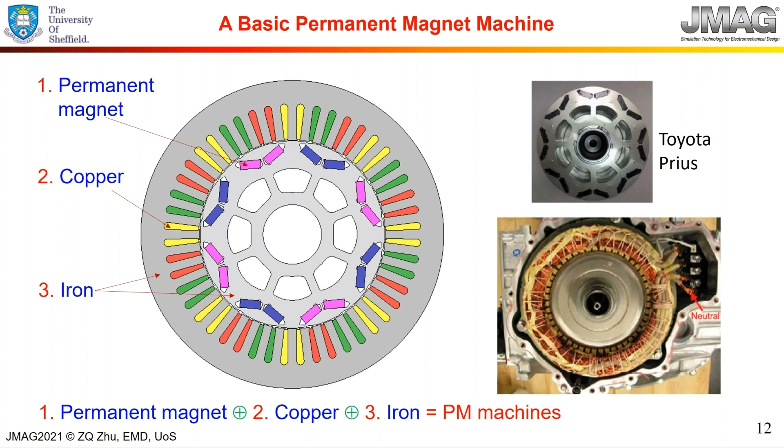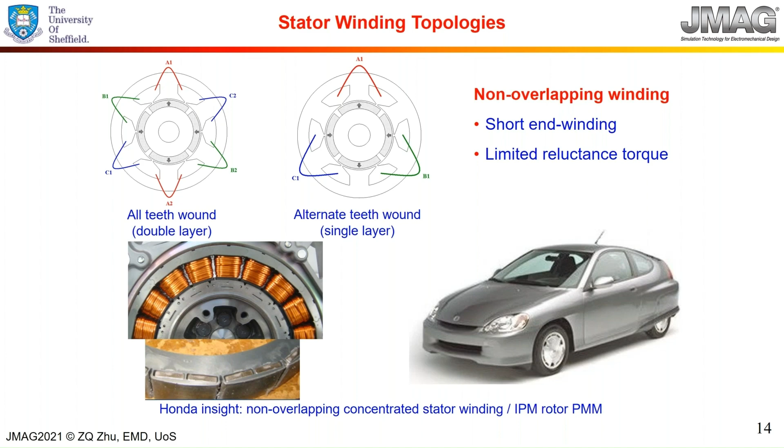So the reluctance torque will be reduced. It also, sometimes depending on the slot number, pole number combination, could even disappear. This is why if you look at electric vehicles, the vast majority of machines are not using this one, but using this one instead.

I'll go a bit further anyway and talk about the fractional slot interior permanent magnet machine.

Professor Zhu, sorry to interrupt you. I think it's time for launching the first poll. Okay. Fine with you? Yes. And in the meantime, it seems that on your screen we cannot see the cursor of your mouse. So when you are showing something, we are not able to see. So maybe can you just try to unshare your screen and share it again? Maybe it will solve the issue. I share my screen now. In the meantime, I will start the poll.

So to all the attendees, you will see on the screen the first question. Okay, so now you should see the question. So you can answer the poll. We will let you a couple of seconds to answer it. So the question is why it is preferable to use IPM machines rather than surface-mounted permanent magnet machines: because IPM machines use more magnets, produce more eddy current loss in the magnets, or have no additional magnet retaining. So you can answer the question, and we will review the answer maybe later during the presentation.

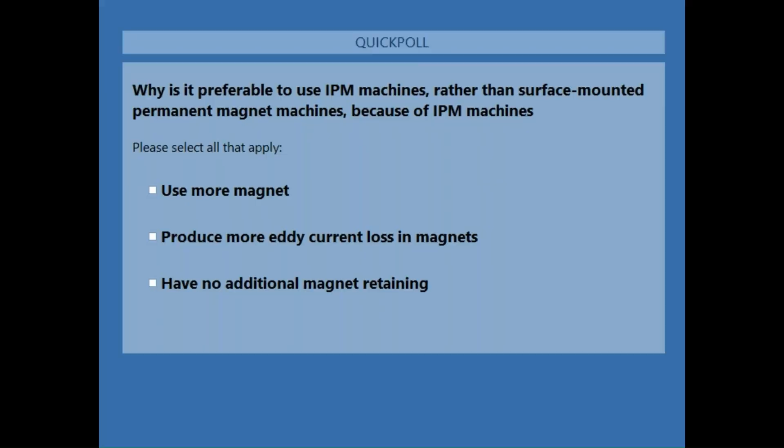Okay, shall I come back? Okay, maybe Professor Zhu, let's wait a couple of seconds again to let people answer. It won't be long. Interesting. I can't see your screen. I don't know whether the audience can see the question. Yes, because I'm seeing they are answering, so I'm sure they see the question. That's good. But maybe it's because you are sharing your screen. Very simple question. Okay, 10 seconds. Please answer now, and we will go back to the presentation. Okay, so I will close the poll right now. Thank you for all your answers. Okay, Professor Zhu, can you share your screen? Okay, I can see your screen now.

So in summary, I just try to talk about the fractional slot machine. A fractional slot machine is very simple. First of all, you can just define that the number of slots per pole per phase is fractional, it's not integer. Traditionally it's integer, and this is a fractional number, and it's getting very popular over the last 30 to 40 years. Before that, you do find fractional slot machines in hydroelectric generators, for example, but less popular. And now it's getting very popular.

So this type of machine essentially can have short end windings and consequently high torque density and high efficiency. It usually can be designed with a sinusoidal back EMF waveform, and because of the fractional slot number, you can have low cogging torque and low torque ripple, and potentially good flux weakening and fault tolerant capabilities as well. And as I said, it's now getting popular. One of the disadvantages I mentioned already is the reluctance torque may be reduced or even diminished. So that's the problem.

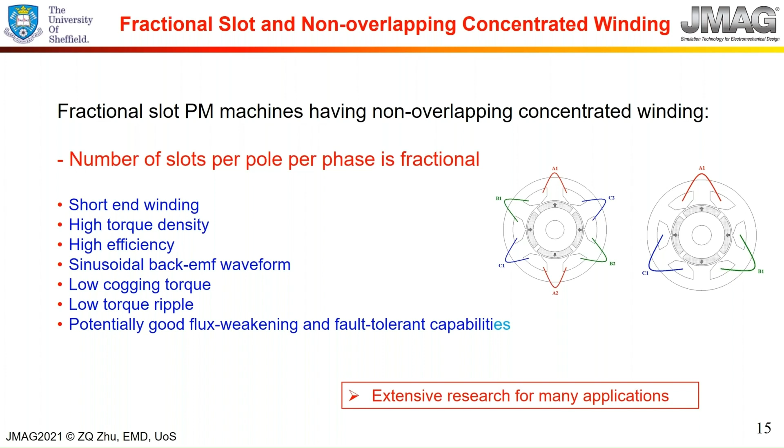Okay. And now I'll talk about the story first. This is the 15-slot 10-pole one. Essentially, if you look at the slot number and the pole number, it's 3 to 2, divided by 5 in this one. That means K is 5 in this case. Then we have 3 and 2. 5 times 3 is 15, 5 times 2 is 10. So here Ns is the slot number, 2P is the pole number. This used to be the most popular slot and pole number combination for fractional slot machines with non-overlapping winding. That means the coil is simply wound on each tooth. They are not overlapping.

And in fact, this one has got a high winding factor, because it has 0.866. But I put it down here as the opposite, a low winding factor. Usually 0.866 is not too bad, but I put that down as a low winding factor. The reason is I would like to make it even higher. Okay, that's a key point.

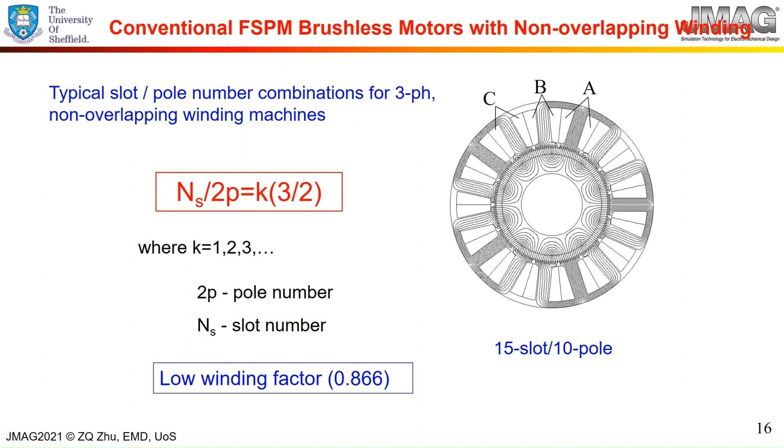So what I'm trying to do is maximize the winding flux linkage and also the power density. Why this one only got 0.866 is because the coil pitch is a short pitch. So in order to maximize the flux linkage and then maximize the torque and the power density, I'm asking, can I make the coil pitch equal to the pole pitch? If I make the coil pitch equal to the pole pitch, then I can maximize the flux linkage. So obviously, we would always like to make some mathematical equation, right?

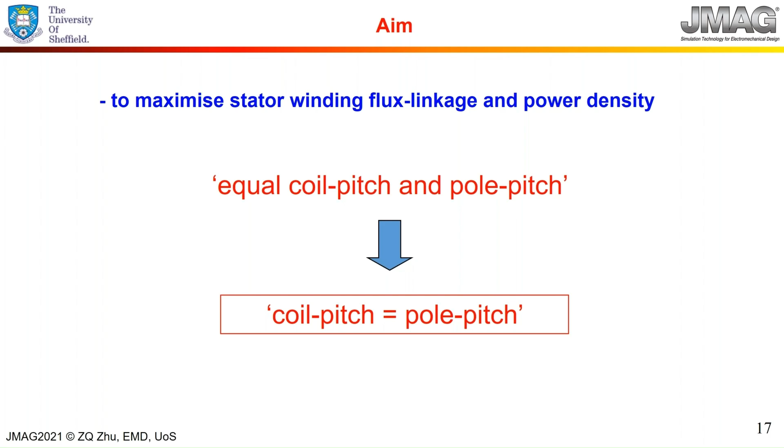And then here I put it on coil pitch equal to pole pitch. But this is exactly the same as this one. Okay, now let's have a look how we can achieve that. Obviously, we can employ overlapping winding, use the integer slot machine rather than the fractional slot machine. I'm talking about fractional slot machine, okay?

But here, if we try to employ overlapping winding, make the coil pitch almost equal to the pole pitch, then I can maximize the flux linkage. You only make the short pitched winding to reduce some harmonics. That's another matter. So essentially, it's this kind of category.

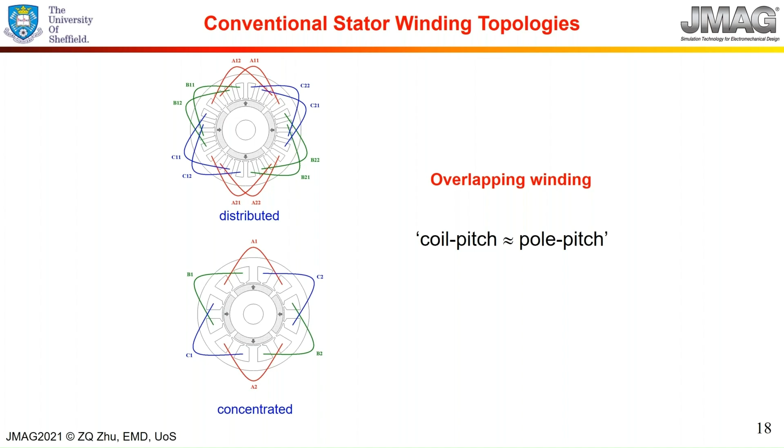But today, what I'm going to talk about is mainly not this type, but the other type, non-overlapping winding type. Okay, so that means I can't use this one. Otherwise, it's very simple. The solution is already there. Then it's very interesting. I just try to recall here.

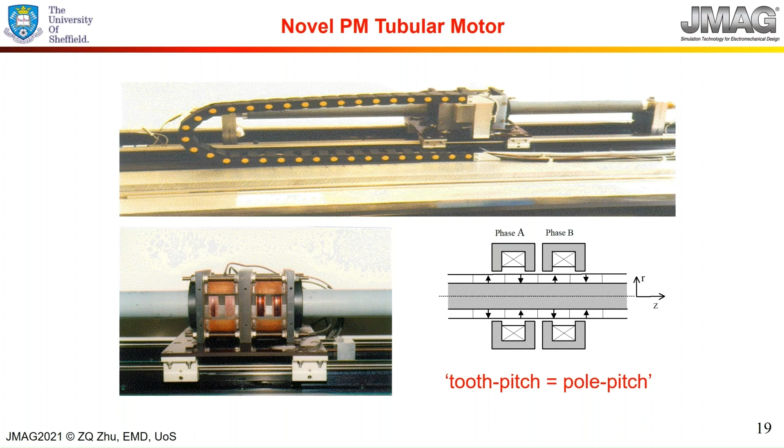Now, by utilizing this concept in this fractional slot machine, we can try to do that as well. So we try to make the coil pitch equal to pole pitch exactly. So that's the simple equation, 2P equal to Ns. Now this is the machine. We have 10 slot and 10 pole, okay? But you will find this machine essentially has 10 modules there. They're all identical if you look here, here, everywhere.

The flux linkage definitely is maximized. But like I mentioned for the linear motor, you have very large cogging torque anyway here. But this is only one phase. That's a problem. If we want to have 3 phase, this is not possible, except if you try to use 3 modules like that, then, to be honest, it's not easy. And if you do like that, you actually got the gap because of the end winding there. That's a problem. So in theory this is really not a realistic machine.

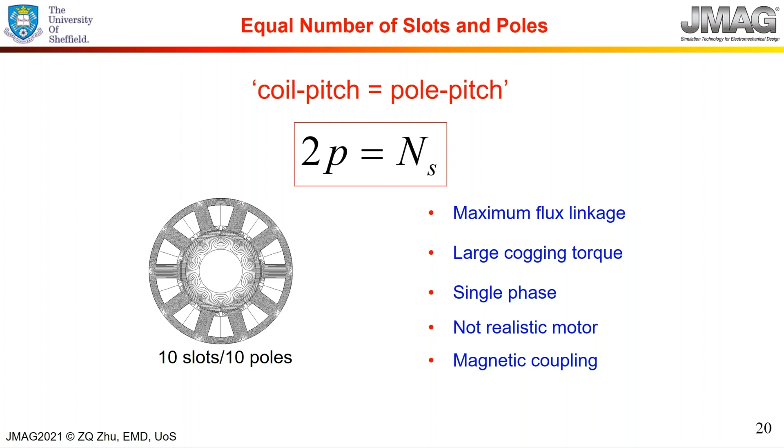It will be very good if you want to use this one as a magnetic coupling because it's locked together. You can't have relative motion between stator and the rotor, but locked together as a coupling, that would be good. So that means we can't do that anyway. So what do we try to do? We try to, I always call it, one step back.

Okay. So we make the difference not 0, but 1. So the slot number and the pole number only differ by 1. So that's very close, right? So we try to make the coil pitch and the pole pitch almost the same. Then in this case, we can expect that the flux linkage will still be relatively high, so we can achieve high torque density. Because this is a fractional slot combination, usually the cogging torque will be quite small.

Imagine if we want to make them differ by 1. So you can see I'm using 2p. That means pole number is always an even number. North pole, south pole, they always come together. And then the slot number must be an odd number in order to satisfy that. Then we can try to work out how many slot number, pole number combinations there are. So we can find 3, 2, and then 3, 4, and then 9, 8, 9, 10, all that kind of combination. So you do have a lot of combinations.

In fact, you will find quite a lot of combinations there. A 3-2 is very popular; people use it for high-speed applications, for example. And 9-8, you sometimes find people use it in servo motors as well. But I'm going to show you some problems with this type of machine. The unbalanced magnetic force could be significant, depending on the electrical loading, how much current you put in.

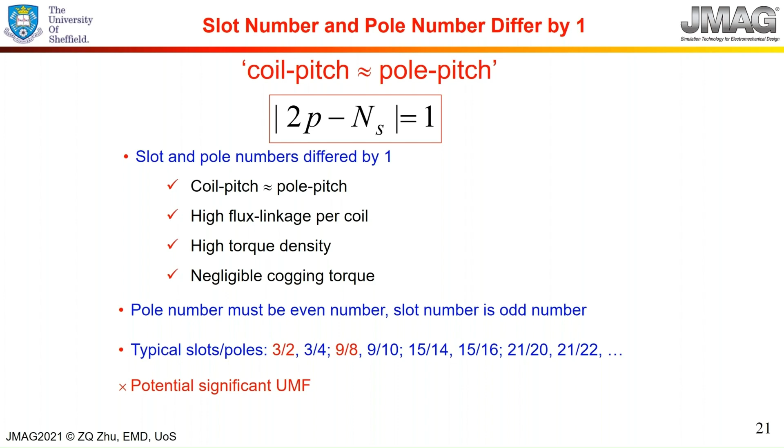Okay, let's have a look. So this is an example of a 9-slot 8-pole machine. You have 9 slots there, 8 poles there. In this type of machine, we have north, south poles, all those there. That's conventional. But if you try to work out the best winding connection to maximize the flux linkage, it needs to be like that. You have one coil here, one coil here, one coil there. That means the 3 coils should be adjacent to each other.

Okay, so for phase A, you have coil 1, coil 2, coil 3 there. And also the middle one needs to have opposite polarity compared with the adjacent one. You can see here, positive, negative, but the adjacent one here is negative, positive. If you look around the circumference, it's opposite. Then that one is also the same. You have negative, positive on that side.

But to be honest, it's quite easy to think about. Suppose you change it here, then the current in that slot will be cancelled. And in this case, they are all minus, so all the same direction, so that's fine. And here they are all positive, it's fine. So we have all phase A winding here, B there, and then C there.

So if you look at the open circuit field distribution, that means produced by the magnet, at first look the field clearly seems not very uniformly distributed, in the stator at least. You can see fewer flux lines there, more here. But actually, if you look near the air gap, they are quite uniform, very cyclic, symmetrical there. So it's not a problem.

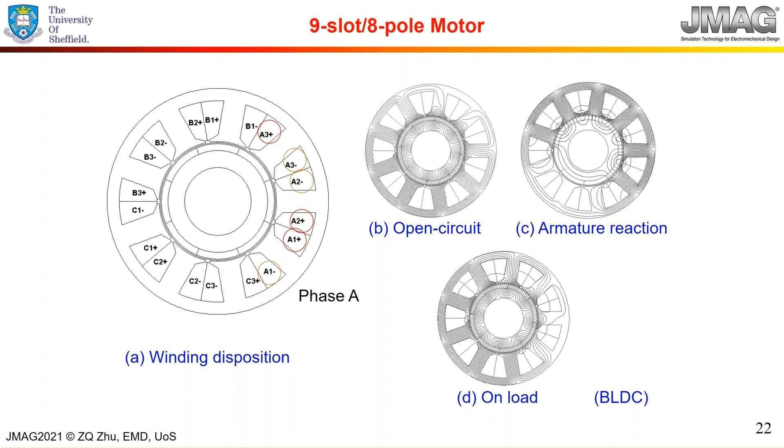In reality, of course, the field is always produced by the magnet together with the field produced by the current, then it's something like that. You still have asymmetry there. Then you could say, why should I connect the coils like this? I can make it symmetrical. You're right. But in order to maximize the flux linkage, you must do that. Otherwise, the flux linkage is reduced. Here shows an example. I'm not going to talk about that in detail, but I'll show you a little bit.

You can see this is the star of slot, or star of EMF phasor, which I usually teach during my lecture course. Essentially very simple. You first mark the slot number, 1, 2, 3, 4, up to 9 slots, 9 coils. That's for each coil you put onto the tooth. One coil, you mark. And this is a physical mechanical angle.

And then because this is an 8-pole one, you multiply by the pole pair number, which is 4. So if I fix number 1 there, then the next one, 2, is 40 degrees apart. 40 times 4 is 160 degrees. So electrically, where does it go? It goes here. 1 here, 2 there. Then you can apply that to numbers 2, 3, 4, all of them. Then you end up with the MMF or EMF phasor diagram like this.

And then you try to group them. When you group them, you should keep the angle between different vectors as close as possible. That's one. And secondly, you can reverse a vector if you like. So in this case, for example, I can reverse number 2 to here.

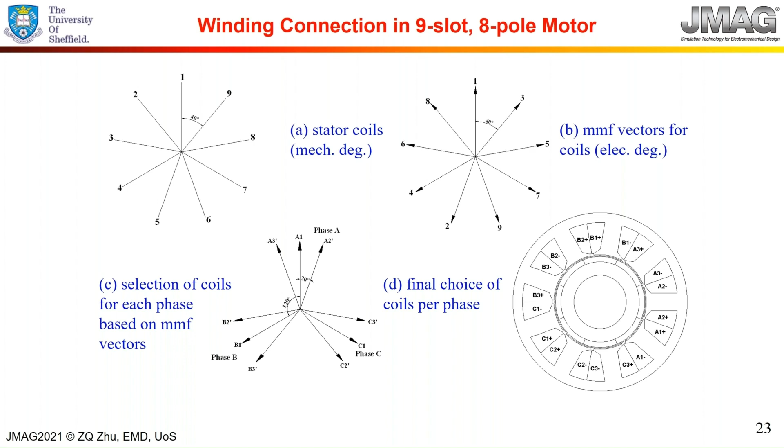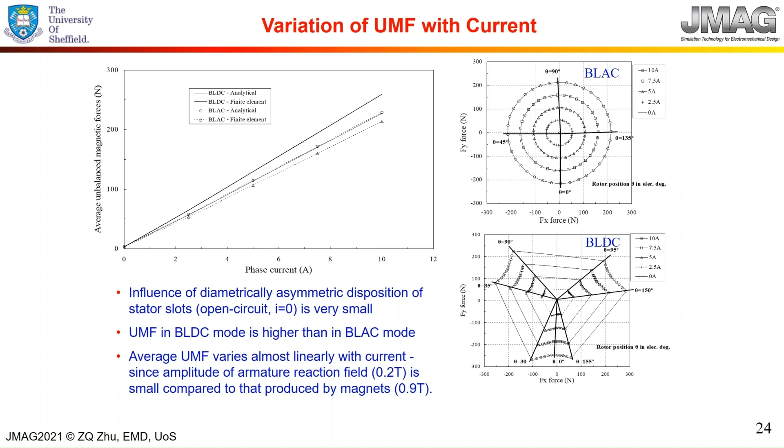In fact, this unbalanced force value comes from the field produced by the magnet plus the current field together. There's another term, which is the square of the field produced by the current only. That is a square relationship. That's why I'm saying if you increase the current further, it will be nonlinear. So this is the problem: we've got unbalanced magnetic force.

So what do we do? We step one step back, make that differ by 2. Okay, and then the coil pitch and the pole pitch will be very close. I can show you this is quite a good one.

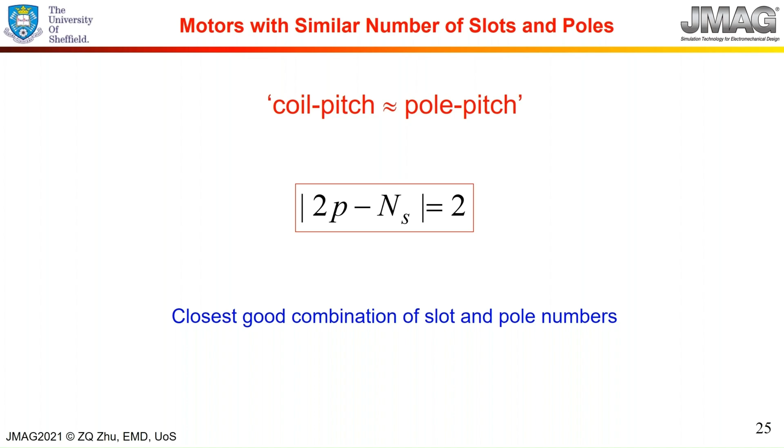Okay, I think because of the time, I probably need to talk a little more briefly. I notice the time passes very quickly.

Now, for this one, when you differ by 2, you can have two scenarios. One is the slot number is higher than the pole number. Another one is the pole number is higher than the slot number. So we have 4-6, 8-6, all that kind of thing. This kind of phenomenon all happens. Even in the switched reluctance machine you can have 6-4, and you can also have 6-8 as well. The permanent magnet machine is the same here. And then you can find 10-12, 12-14. This is a popular combination, right? And so that's what we try to do.

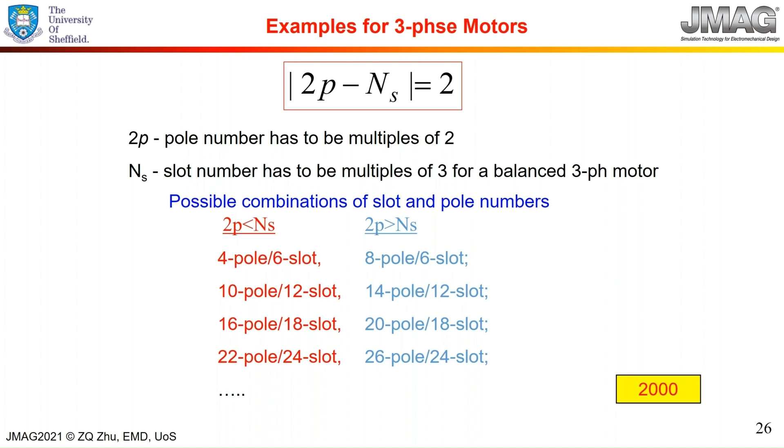I did all this work in 2000, 20 years ago. And then you can find that the machine should be like this: 10 pole, 12 slot. Then we end up with a coil connection. It should be like this because you have 12 slots, 3 phases, so 4 coils per phase, and then you have 2 there and 2 there.

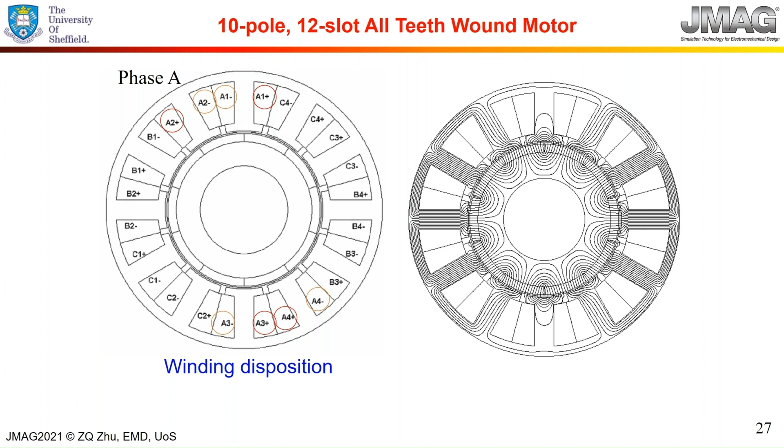Yeah, here the polarity is also opposite. So essentially, if you look at the field produced by the coil, it goes like that. And then there's another one there, diametrically, symmetrically located. At least you wouldn't be able to find the unbalanced magnetic force if the rotor is right in the center, not eccentric. Then it's balanced, no unbalanced magnetic force. You can see the field is diametrically very symmetrical, and then you can work it out. I'm not going to talk about that further. You can work out why it should be connected like that.

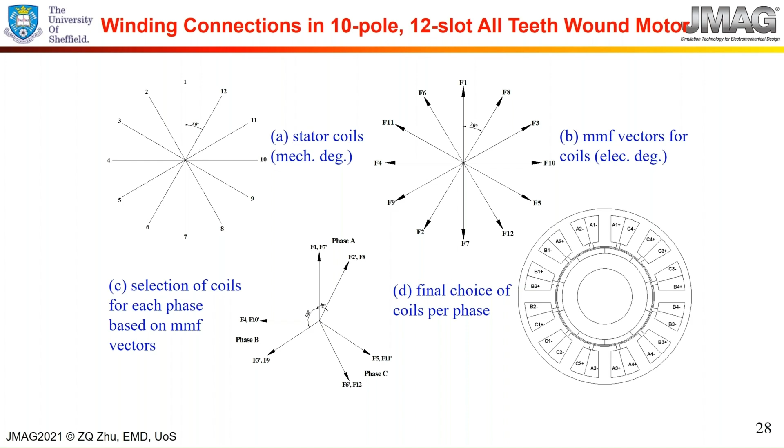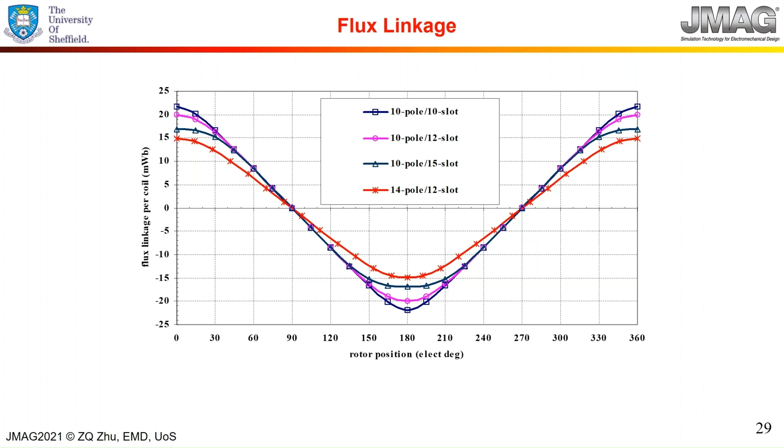Very simple, and then you can see we can have the flux linkage with different slot number, pole number combinations. For 10 pole, 10 slot, I plotted there. This one is not possible because that's only one phase, but I put it there because this is the maximum. Then you have 10, 12, 10, 15. And then you look at the flux linkages, the EMF is like this. 10, 12 is there. 10, 15 is there, the inside one.

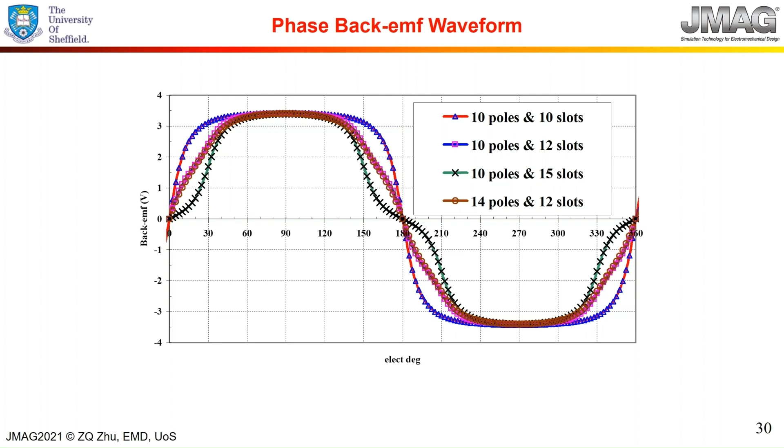Unfortunately, I didn't show the fundamental here. But at least if you look at this, if this is operated as a brushless DC, you can see the difference there. And then this is the line EMF, because ultimately the torque is due to the line EMF, and this has got a lot of harmonics there.

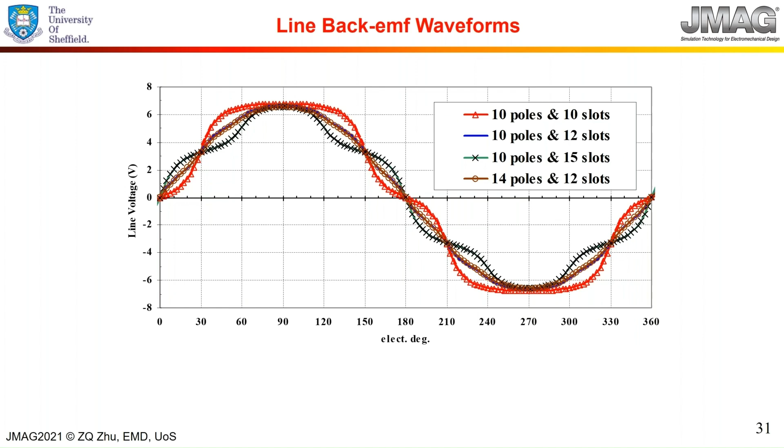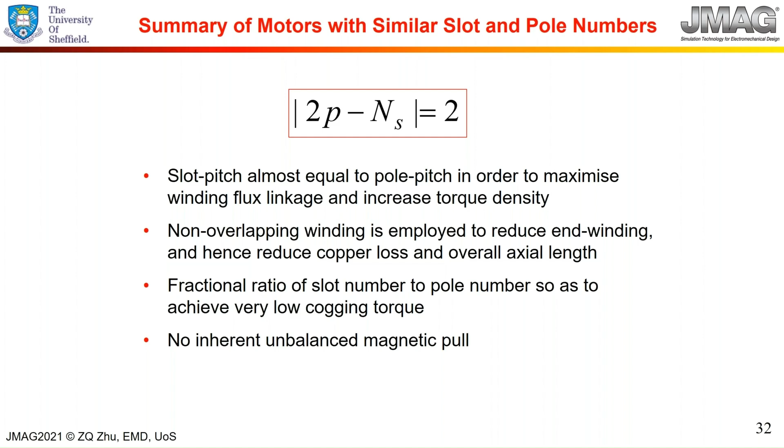And then I just try to make a summary. It's a good machine. First of all, slot pitch and pole pitch are still very close. The winding is still non-overlapping winding, so the end winding is very short. Still a fractional slot number, so the cogging torque is still quite small. No unbalanced magnetic force. It's good. Now we can have a look further.

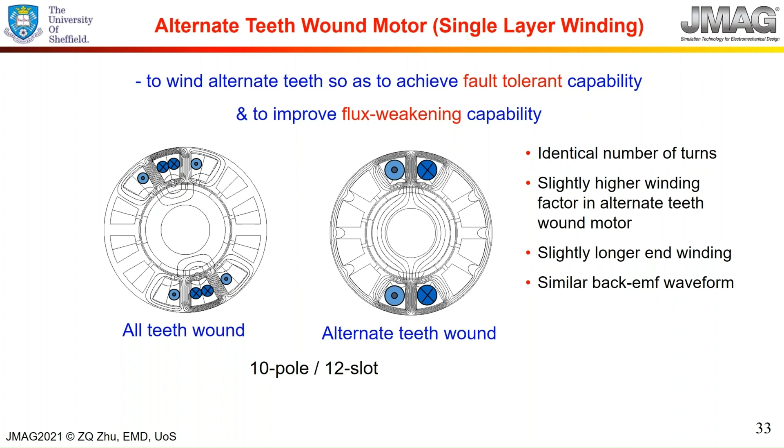I mentioned that with concentrated winding, you can have all teeth wound or alternate teeth wound. So this is alternate teeth wound. At that time, I got this idea from the aerospace application because they're using this type, alternate teeth wound. If we make a comparison, this one and that one are very, very similar. This one's end winding will be slightly longer, because it used to be distributed into 2 coils, now only 1 coil there. But they give very similar results.

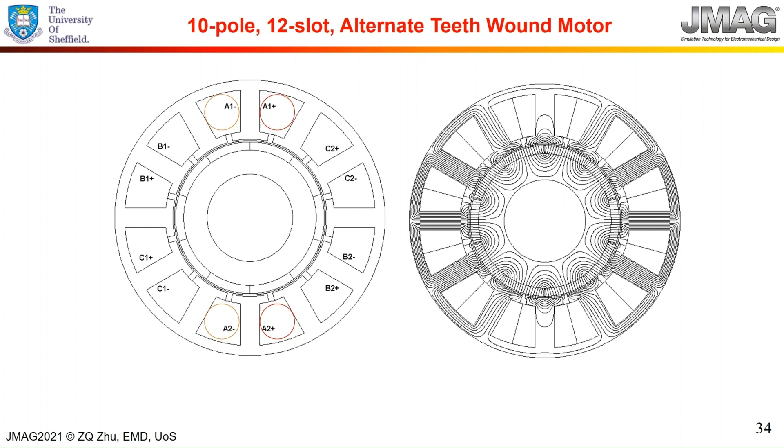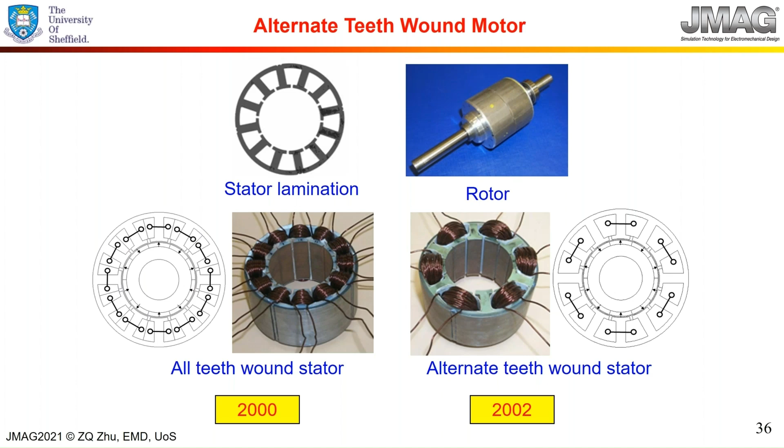You will see later. The coils are diametrically opposite like that, so symmetrical, no unbalanced magnetic force, and you can work that out. That's a bit easy. Only 2 coils there, simply phase A, B, C. And then that's the machine. You can see this machine and that machine can share the same rotor and the same lamination, for example. Actually this should be a little bit longer than that, but only a tiny bit. So it's essentially a very good machine. I'm not going to talk about this further.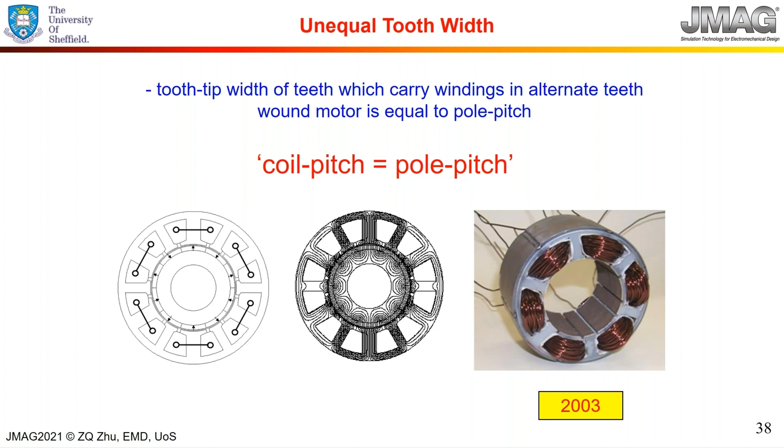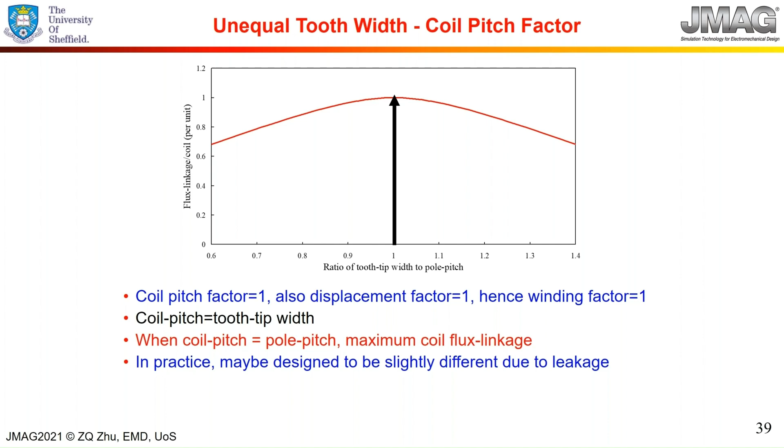What do we try to do? We try to make the coil pitch equal to pole pitch to maximize the flux linkage. You can see very easily here, this is the prototype. It's a lot narrower here, wider here. So from here to there is exactly the same as the pole pitch. Then we can collect all the flux produced by the magnet and maximize the flux linkage. If you really want to work it out numerically, essentially we're working out the coil pitch factor, the winding factor, and maximizing it. This is just for illustration, and quite easy to understand. Now the machine looks like that for different slot number, pole number combinations.

Okay, so for 4 pole 6 slot, it becomes like that, and then 12 slot 10 pole becomes like that when you make an unequal type. So clearly, when you try to use it in the low pole number, the difference is a lot bigger.

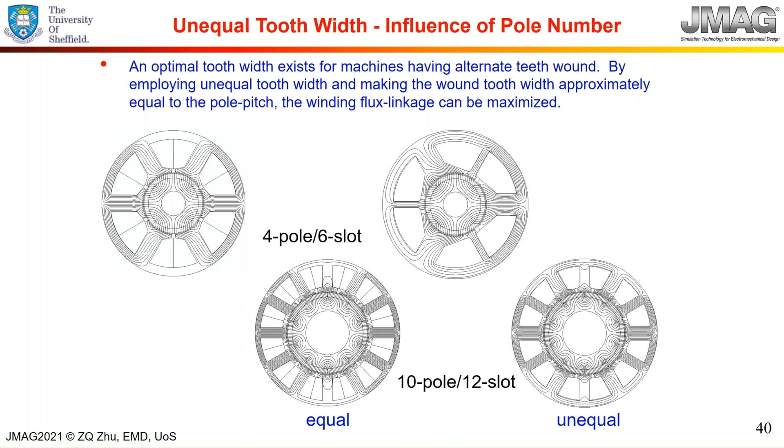Here it begins diminishing. I have plotted the same thing a bit more there. What do you see? If you increase the pole number and slot number, the difference between this equal tooth and the unequal tooth type becomes smaller. When the pole number is smaller, the difference is a lot bigger.

Partially this is because you can see the difference between the slot number and the pole number - the number itself is getting smaller and smaller. They're all divided by 2 anyway, but then divided by the pole number, its percentage is a lot smaller, so getting closer and closer. And then ultimately, the leakage kind of things make the difference diminish. Okay, that's what I would like to say.

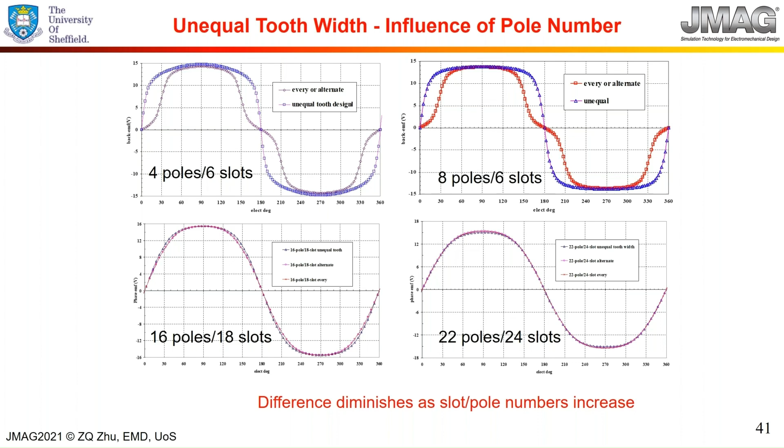And I will skip that and then talk about this all-tooth one, the alternative one, unequal one. So you can see all the machines there. As I said, this is all made by our group. We can build this in the group.

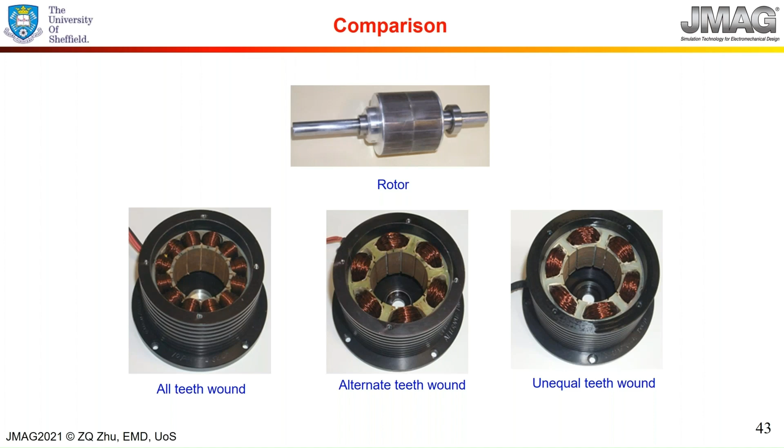And then you can see the interesting thing here is first we have to show the inductance - the self-inductance and also mutual inductance. You can see when you go from all-tooth one, alternative one, to unequal one, the mutual inductance is reducing. The all-tooth one has the slot shared by 2 sides, but now they're separated by the middle tooth, so the mutual inductance is essentially gone.

This is important because this is what the fault-tolerant machine requires. They don't want to have the mutual inductance, so in case one phase has a problem, it's not going to affect the adjacent phase. So no problem, no magnetic coupling. This is one thing. Another one is interesting.

You can see that when you do like that, the self-inductance is increasing. Yeah, self-inductance is increasing. Now this is also important for the fault tolerant, because if this machine is surface mounted, the inductance is quite small.

So in this case, you can increase the inductance, then make the so-called per unit inductance to limit the short circuit current. So this is quite important.

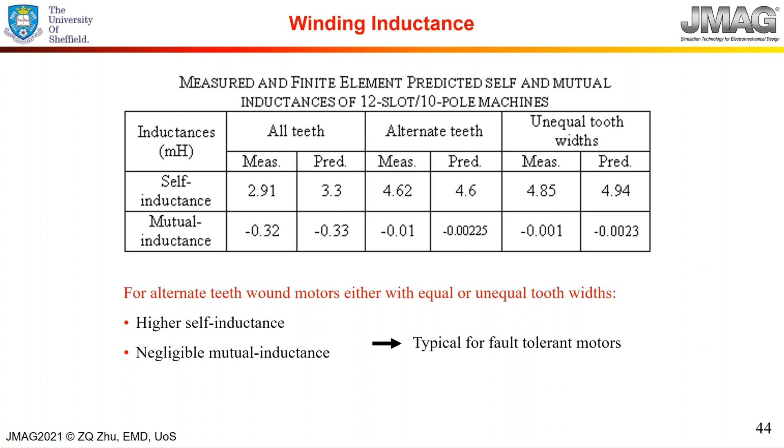But on the other hand, this is also important, the inductance itself, because for the flux weakening, you used to consider the surface mounted magnet machine is not good for flux weakening. That's not true. You can achieve perfect flux weakening as well. That's not the problem with surface mounted magnet machine. By doing that, you can also increase the inductance to achieve infinite flux weakening capability, no problem. Yeah, surface mounted magnet machine, the problem is not lies here. So this is not a problem.

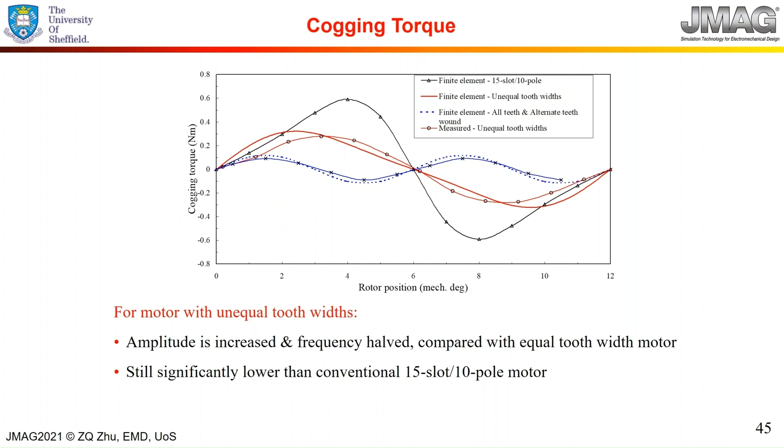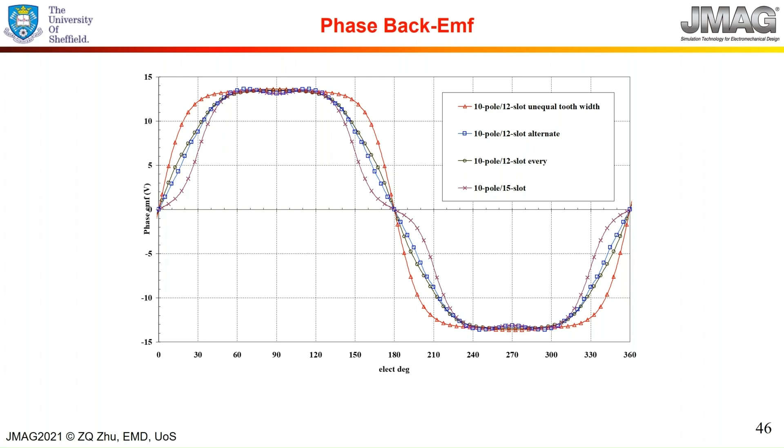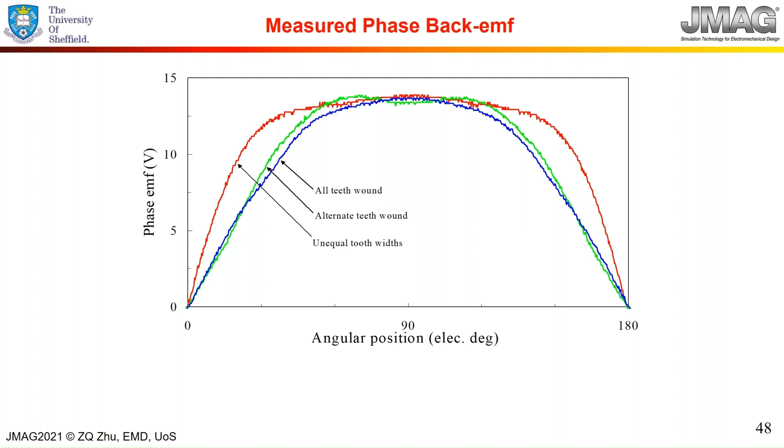We try to compare 10-10, 10 pole 10 slot, and 10 pole 12 slot. They're almost identical. But here we have used the unequal tooth width. So this is what I say the dream comes true, because I want to maximize the flux linkage.

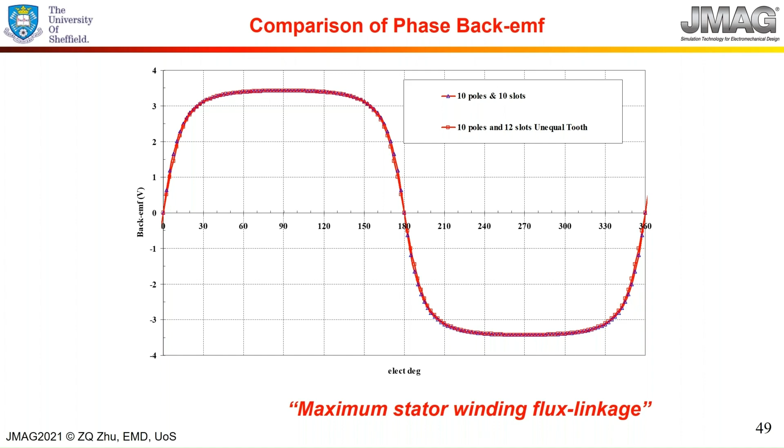So that's it. Then of course, if you have a look at the torque, in this case it's the brushless DC operation, by the way. Then you can see the torque ripple is reduced and the torque is higher. Average torque is higher as well.

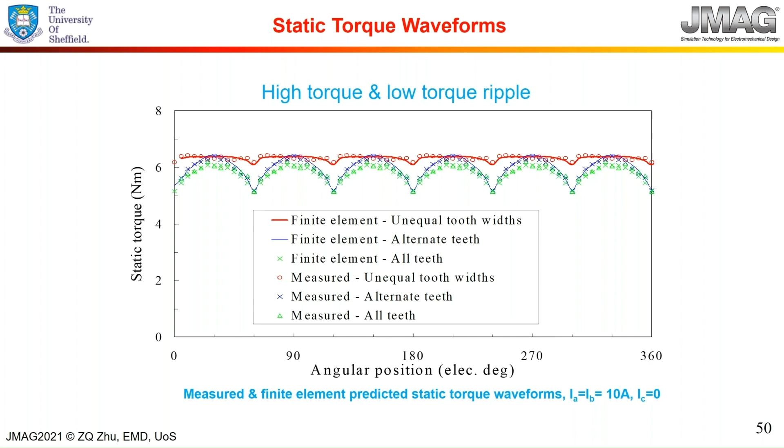I'm not bothered to talk about the agreement between the measurement - that doesn't matter. Anyway, the key point, if you look at the overall here, mostly the torque is higher. So this is the fractional slot machine. Okay, we can go further.

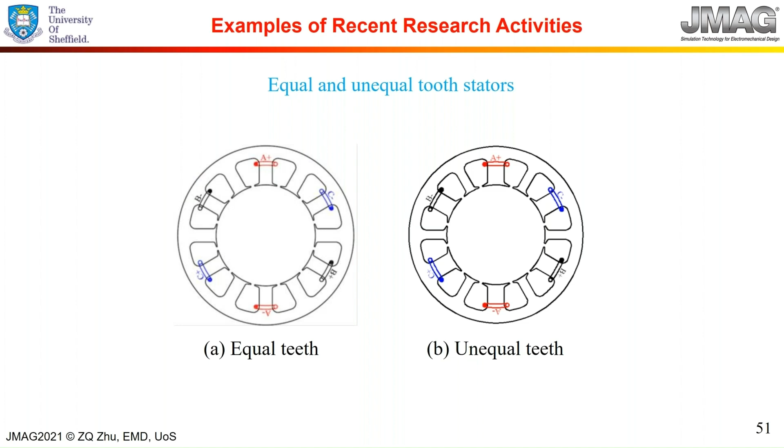Now in this case, I just mentioned that we have alternative tooth wound, alternative with no coil there. But we can also make that unequal by maximizing the flux linkage. But this is the one people use in aerospace for fault-tolerant machines. And in this case, you can see for fault-tolerant machines, the only difference here is they make the phase number even higher than 3.

In this case, we have 6 phases there, for example, it could be 5 phases or something like that. Now, important thing is... I'm sorry, the screen is not showing properly.

This one essentially shows when phase A gets short circuited, it's not going to affect anything, because the flux is very localized, not coupling the adjacent coil, not penetrating into the magnet. So this is quite important. When phase A gets short circuited, it's not going to affect the adjacent winding, so the adjacent winding can still operate. And it's not going to cause demagnetization, because the effect on the magnet is very little.

Now the key point is, the torque is produced by the harmonics, not the fundamental, not the so-called fundamental due to the coil. It could be just 2 pole, but here it's a 10-12 type, and it's the 5th harmonic which is producing the torque. This is what people call flux modulation or the magnetic gearing effect. I'm not talking about that in detail, but I will cover it a bit later.

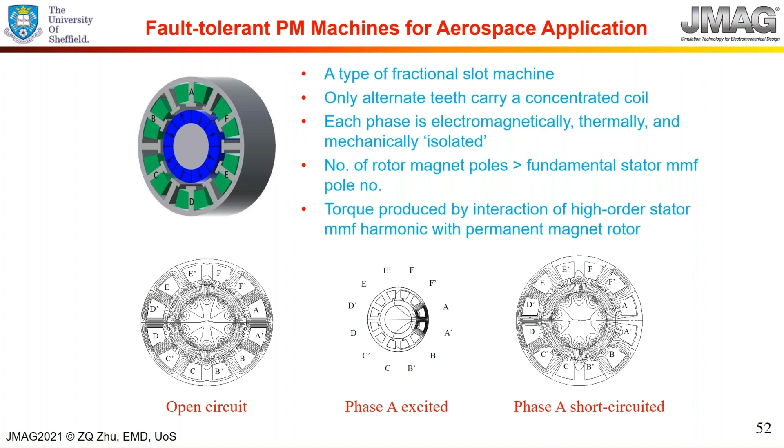For that kind of concept, we have a Rolls-Royce University Technology Center, directed by my colleague, Professor Jewell. This is all related to aircraft or aerospace. In the future, a large aircraft will need 1 megawatt of power, so it needs to be produced on board, and this is a type of machine which needs fault tolerant capability.

Of course, the package doesn't need to be different, but the type of magnet does. You wouldn't be able to use neodymium iron boron magnet because if you put the generator near the engine, it's very hot. So you can use samarium cobalt, for example. And it depends on the application, the market sector, and the cost.

If it's domestic appliances, cost is very sensitive. For automotive, yes, it's sensitive, but performance is also very important. And for aircraft, cost is the second consideration - the top consideration is high power torque density and high reliability.

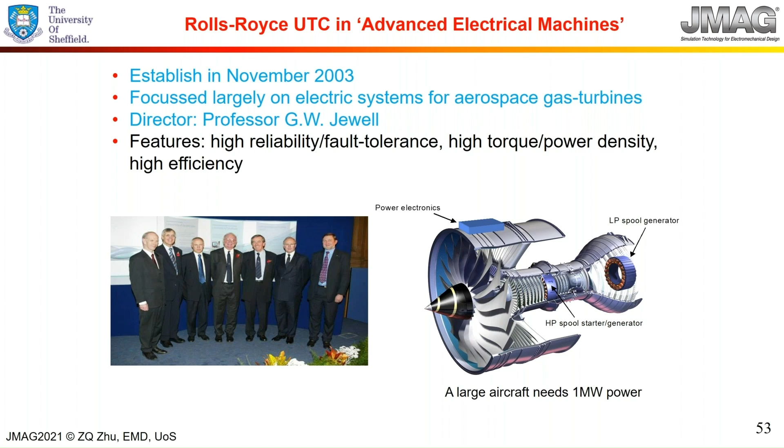We can do further with this alternate tooth wound - we can make it modular. So what I'm doing here is cutting that into pieces, splitting the tooth, to make it modular.

Because for some systems, you have a very large diameter, and then you can't machine the lamination or cut the lamination into a single piece. You can't transport that, you can't assemble it easily. So you need to make it modular. This is also popular, this type.

For example, it's very often used in wind power generators, because the direct drive has a very large diameter, so it's very slow rotating, and the size is big.

At Sheffield, we have this Siemens Gamesa Renewable Energy Research Center, and I'm also the director for this. In 2019, we celebrated our 10 year anniversary - it has been very successful. Because we are developing the most reliable, high power density, high efficiency generators for offshore wind, we helped Siemens Gamesa become the global leading manufacturer for offshore wind turbines. We helped Siemens Gamesa develop the 6 megawatt, 7 megawatt, 8 megawatt, 10 megawatt, and 14 megawatt wind turbine generators.

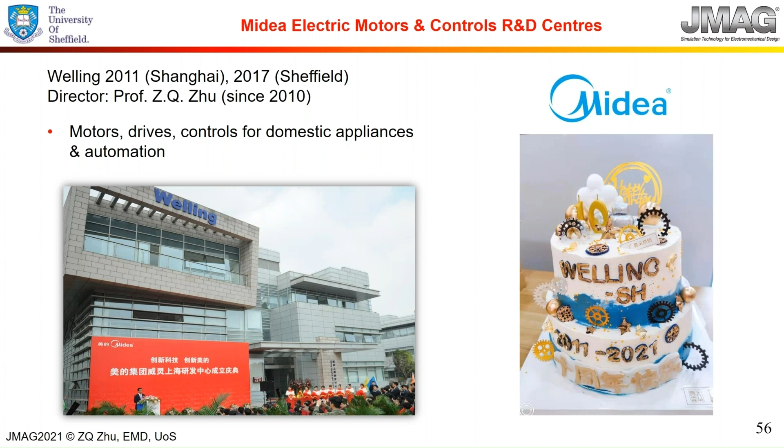This kind of modular topology is also very good for automation to reduce the cost. I'm also the director for the Midea Group Motor and Control Systems Center, and in fact last month was also the 10 year anniversary, so this is a cake for 10 years as well - it's been very successful.

But then I thought, that's not very good, because if you increase the back iron, that means the machine size is getting bigger. So then I'm thinking, how about if we reverse it - we make it an external rotor motor.

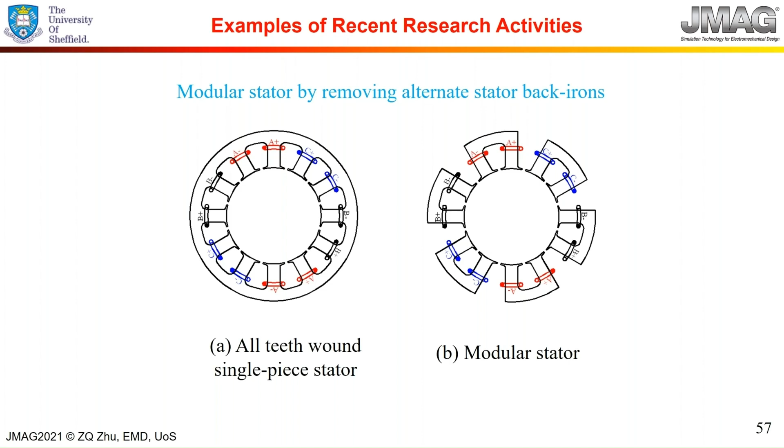Then, interesting enough, I looked at the website and found one company making that. It's exactly the same as I thought. Very often you have an independent thought, then you find somebody already did it before you. So definitely they did it before me anyway. It's called Wavecrest, a company called that.

But when I look at it, I think it's very interesting. They have integrated the inverter as well. So that is one module. You can see the gap is different here and there. That's one module, if you look carefully you can see something like that.

But unfortunately, when I look at it, they used it for the electrical bicycle. Then I thought it seems a bit too much, because a bicycle is very cheap. That's the problem. If you make it modular, performance may be slightly better, but the manufacturing effort and cost is more. If you just use the integral lamination with the fractional slot, you can still achieve good performance. In the electrical bicycle market, the vast majority use the fractional slot machine.

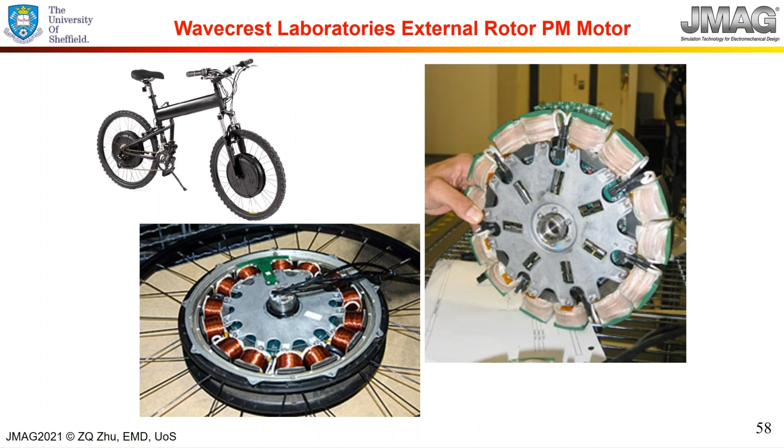Unfortunately, a couple months later I looked at the website, and the company had probably closed anyway. So I think it's important, if you have a good technique, you must apply it to find the appropriate application market sector. That's very important.

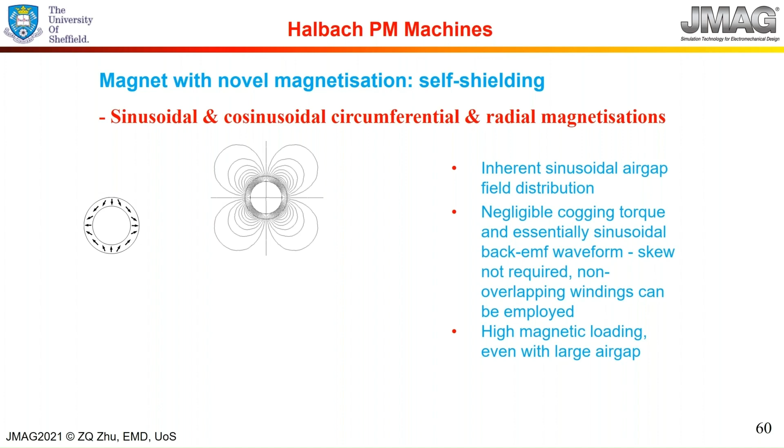By doing that, the good thing is some applications need a so-called idle state with no loss - that means open circuit or no load, where we should have very high efficiency. If you have iron there, you have iron loss, but if you don't have iron there, you get very low idle loss.

Yeah, only have a bit of AC copper loss. Then you can use the Litz wire. In fact, this machine does use Litz wire. This is used for the flywheel. Okay, flywheel. So that's a good application.

So consequently, the air gap is very large, very large. So in this case, if you use the Halbach machine, it's very, very good. It's very good to produce the high air gap field, high magnetic loading, for example.

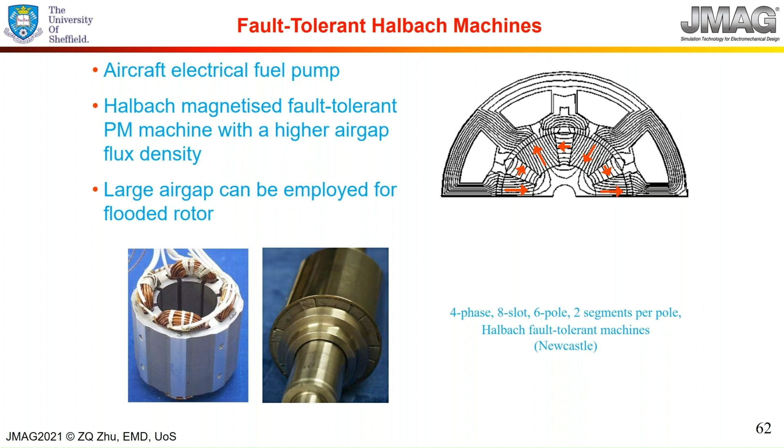I'm afraid I can't talk about that too much. Otherwise, it would take me at least half an hour to one hour to talk about all that stuff. But I just want to show you there's loads of topologies there.

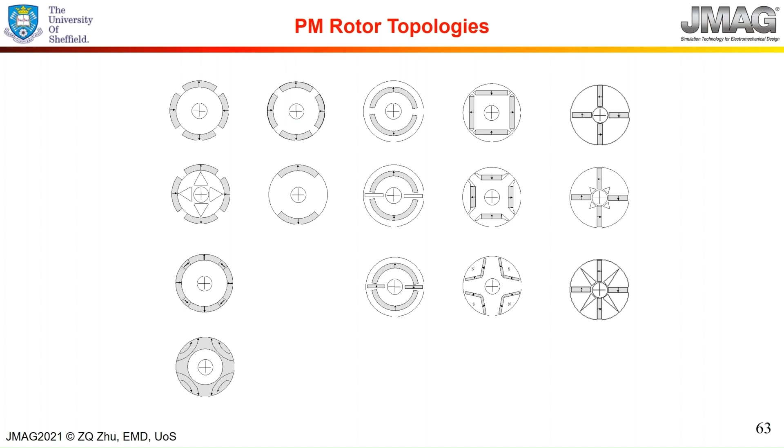Anything you talk about in performance, you need to bear in mind the cost. Whatever application you're using, you need to consider the cost. As I said, cost is least sensitive for aerospace, because the number is low. In aerospace the top considerations are lighter weight, high power density, and high reliability. Otherwise, whether it's wind power, automotive, or domestic appliances, they all require low cost.

In theory, you can increase the performance by increasing the layer number further, but you normally don't do that. I have one example here. You can increase it further, but typically people only use 2 to 3. 3 is already very rare. That's only for people trying to write a paper probably. The company is probably least interested.

If you increase it to 4 or 5, for example, the performance improvement is very small, but the cost of the material and manufacturing increases very significantly. To be honest, I've done a lot of work on that for companies. And the company will immediately turn down 4 layers. Oh, no, forget it. 5 layers? No, far too many. Don't want it. And then, in fact, I asked a student to do the exercise for this Toyota Prius motor.

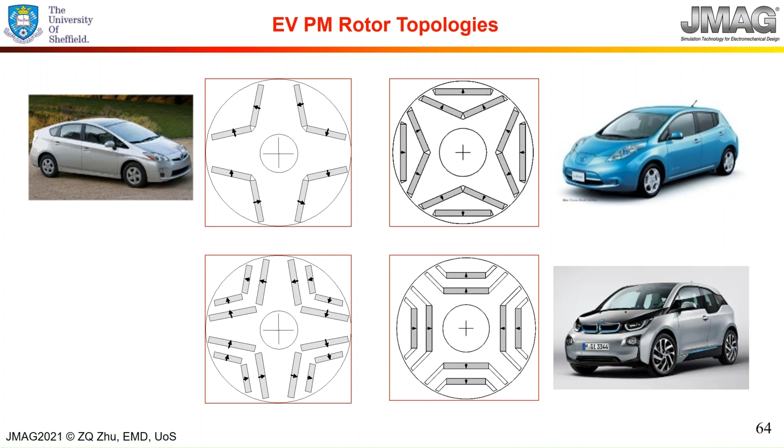But the important thing, as I said, if you look at the commercial one, you can see they always use a very low number there, 2. Of course you can try to use 1, but from 1 to 2, the performance improvement is very significant. From 2 to 3, you still got an improvement, but probably the improvement is only half of that from 1 to 2. Then increasing further diminishes it further. Then the return is quite small.

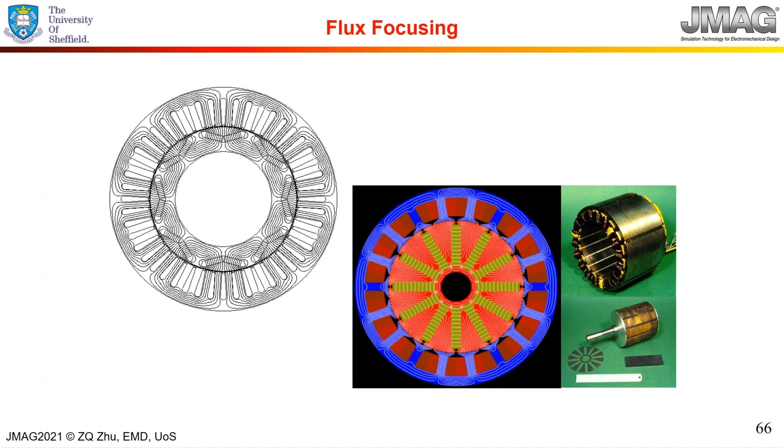Okay, that's quite important. And here shows another one utilizing the flux focusing. So this is spoke type. In fact, this one is using ferrite. You can see the area here and also the magnet cross-section area there. It's quite a significant difference. So you can utilize the flux focusing. So this is also very common as well.

And of course, there's a lot of other topologies, like axial-field machine, for example. Axial-field machines tend to be popular as well. But in any case, the manufacturing is more expensive, more difficult anyway. And some companies try to make axial-field machines, but in most of the applications, still radial field is more popular.

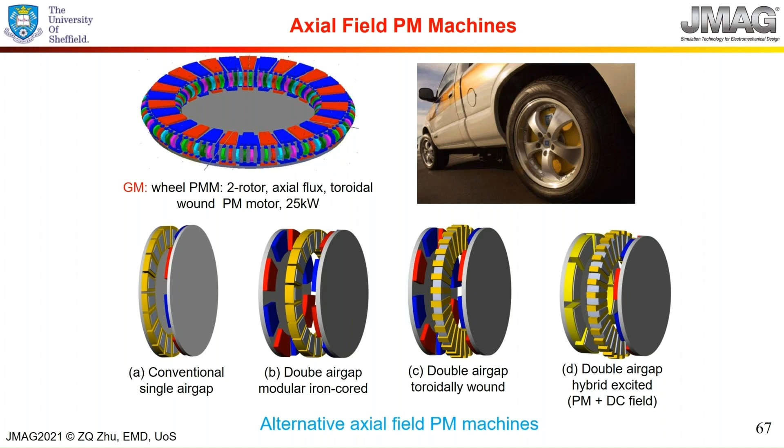The problem for this axial-field machine: one is the bearing. The bearing may have a large axial force there. And more importantly, it's very difficult to make the lamination. The YASA one is here. You can do the lamination for the stator core, but still can't do it for the back iron. Of course, you can say, I can make a soft magnetic composite, but then you have other issues like the maximum saturation flux density is limited, mechanically it is very brittle, and there's a lot of other considerations there. So I just try to show you a bit more here.

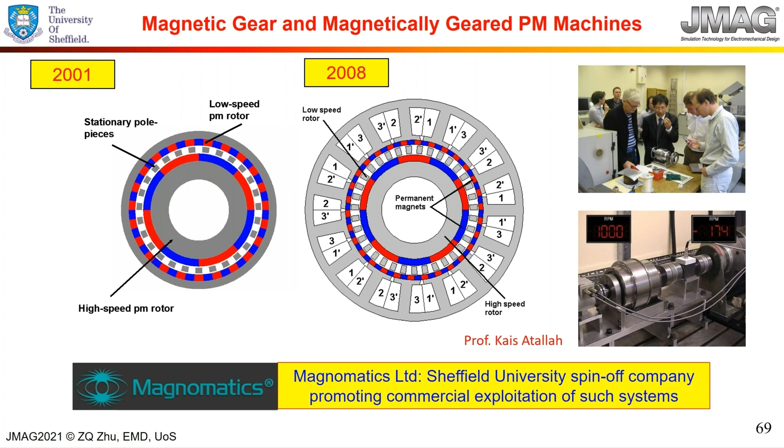A lot of people mislead others. Some papers say, oh, a new theory invented, now we can produce a torque with different pole numbers. That's wrong, in my opinion. It is different there, but you have modulation to make it the same. So you still need the same pole pair number and the same rotation as well. So that's important, okay?

Now, if we look a little bit further, this is the magnetic gear. Essentially, you have a low pole number, a high pole number, and modulation there. If you look at the pole pair numbers there, they must meet some sort of relationship. Then between the low speed and high speed, you have a magnetic gear with the gear ratio.

Then if you look at the rotational speed and the torque, you compare with the others. If you use a high pole number, the rotating speed is reduced by the gear ratio, but the torque is amplified by the gear ratio. This is the gear, okay.

Now I'm talking about this. We have three components there. The magnetic gear needs to have three components, that's true. But for the magnetic gearing effect, it doesn't matter how many you have. You can have even more than three, or less than three, two, for example.

Because this is the key point of the magnetic gearing effect. Okay. And then the pole pair number, that kind of thing, is the flux modulation principle there. Yeah. So from here is the flux modulation. From here is the magnetic gearing effect. They are the same. Don't separate them. If you separate them, it's wrong. The whole principle should have flux modulation and the magnetic gear. Okay, that's very, very important.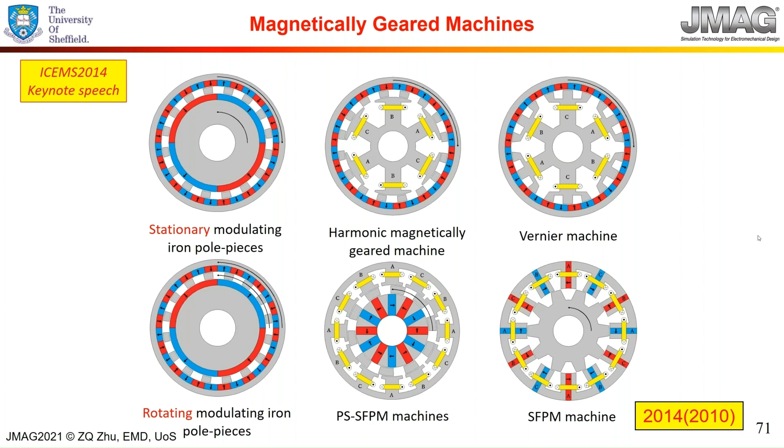Yeah. The basic, most important is here. Flux modulation, magnetic gear. Okay. They are the same. Vernier machine, switched flux machine, they are the same as well. Okay. They're all in the same family. I think that's quite interesting.

Okay, now I try to go a bit further because I talked about the fractional slot machine early on. Okay, I would like to come back. So how about the fractional slot machine? Fractional slot machine is also a magnetic gear, also got flux modulation. Okay, they are. Let's have a look. Yeah, so I'm showing here a figure. I'm not showing in detail because otherwise it takes too long anyway.

This is the rotor pole number. I take that when the rotor pole number equal to the stator slot number as a division here, okay? Then you could have that, well, this is rotor pole number here, that slot number here, and then that there. And the key point here is integer slot distributed winding. So you have more slot number there, okay? And this is a fractional slot machine. So it's all around there. Then over that side is a vernier machine.

What happened with the vernier machine? Vernier machine is the pole number is increased, okay? Is increased, is a lot higher. Now, if you look at that, we have done the analysis. My PhD student did a good work there. In the conventional side, the normal PM torque is somewhere there. But then when you go to that side, the magnetic gearing effect increases. Yeah, the fractional slot machine got the boost there. In the vernier type of machine, magnetic gearing effect got a lot higher than the conventional one. So this is the one. I'm sorry, I'm only showing you the summary, not the detail, because of the time limit.

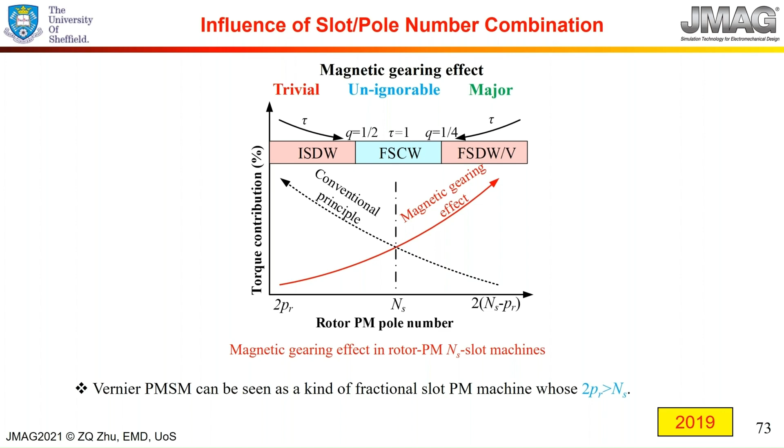And in fact, we can look a bit further here. Now this is a conventional one. The pole number is less than slot number. This is the pole number higher than the slot number. It's more like a vernier type of machine. This is more conventional fractional slot machine. Now, in that case, very important. What is doing the modulation? Where are the iron pieces in the magnetic gear? Yeah. Now, important thing is here.

Important thing is the slot opening. The slot permeance is modulating the flux, then produces the torque. In the conventional machine, the slot opening, the smaller the better, because you are not utilizing the magnetic gearing effect. You don't need to have the flux modulation. Then the conventional PM torque is higher there. But in the PM pole number higher than slot number, this type of vernier machine, the slot opening is important. You got the optimum area there. This is what I'm trying to show.

Okay. This is the result from our numerical calculation analysis, and we analyze a lot of machines. Just to try to show you, vernier machine is a fractional slot type of machine. Maybe multi-tooth type of fractional slot machine, maybe single tooth type, but it is still in the same family, the same type of machine. And the only pity is when the pole number gets higher and higher, you got more and more leakage there, and then the power factor gets worse and worse. Okay, you can't gain everything.

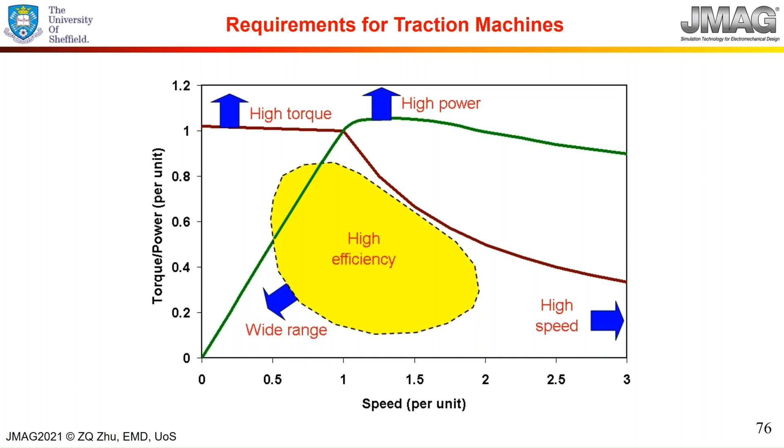That's important. Of course there are a lot of other requirements: low cost, low noise and vibration, easy to manufacture, and easy to repair, for example. That's another matter, but that's the basic requirement.

We have very good cooperation because the important thing is this is for electric vehicle, and the previous one is hybrid electric vehicle. The requirement is a bit different.

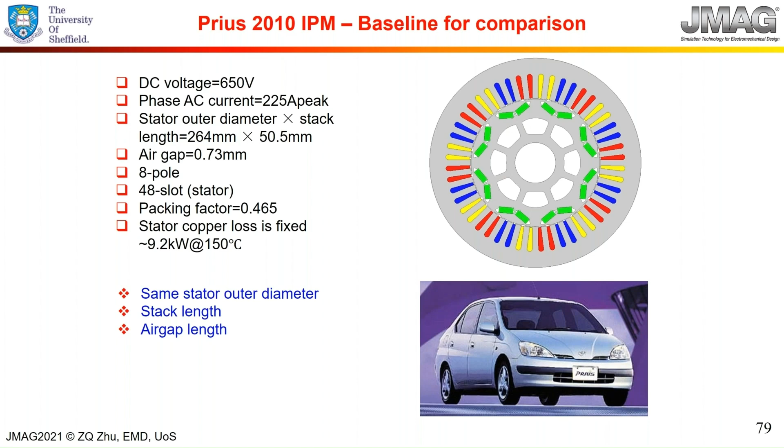Now this is the machine I'm going to compare. The first one is the induction machine with aluminum cage or copper cage.

Then the second one is a synchronous reluctance machine. And another one is a ferrite assisted machine - reluctance assisted by ferrite, or reluctance machine assisted by the neodymium iron boron magnet. Then another one is a hybrid magnet with neodymium iron boron magnet and ferrite magnet mixed together. And then the last one is Toyota Prius. So I hope this covers almost all the materials, all the machine topologies and technologies.

You may find there's a couple missing. One is the wound field machine - but for the wound field machine, I'm going to have a public seminar and talk about that, next month and also in December, so there's a talk there. But there's another one, a switched reluctance machine, which is not covered here.

I personally don't believe - I'll put my opinion very strongly here, you can prove me wrong, I'm more than happy to be wrong - that switched reluctance will ever be a driving force for the electric vehicle. But all the other machines are here; as I said, the only one missing is the wound field machine.

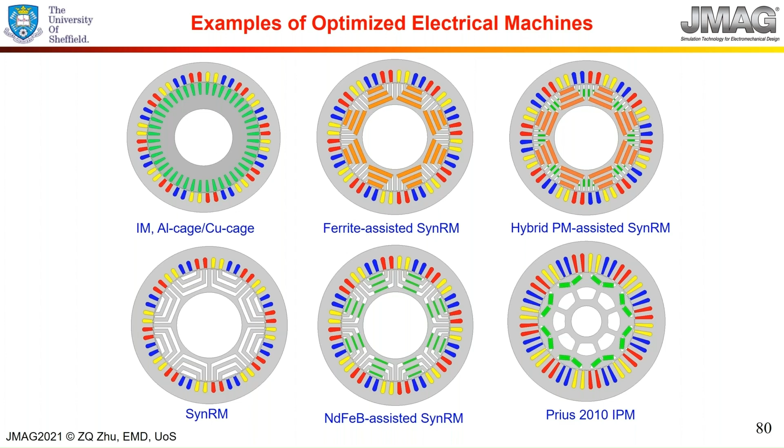Now for all those machines, we have calculated the torque-speed curve and also the power-speed curve, as well as the power factor. First we look at the performance at the rated current.

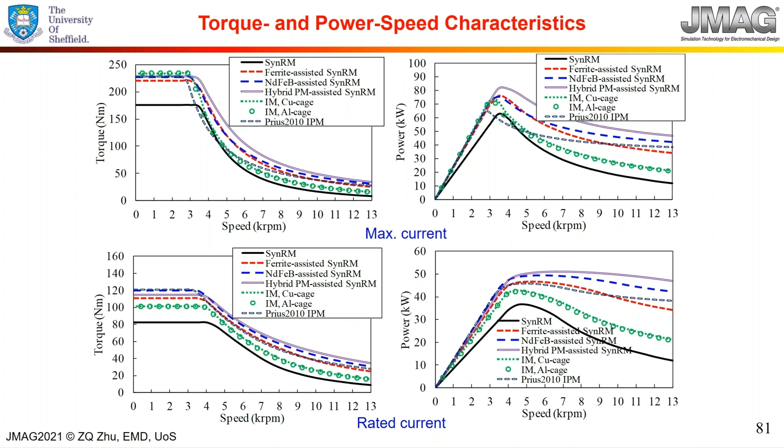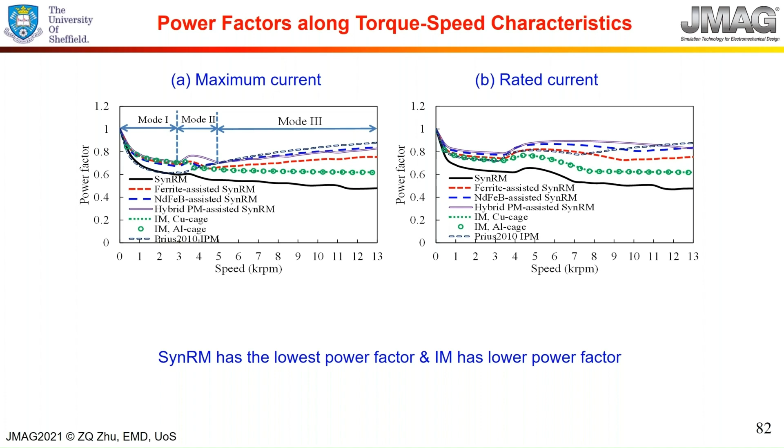So this is a very brief comparison for a variety of machines - quite an interesting one. And then obviously we need to look at the efficiency.

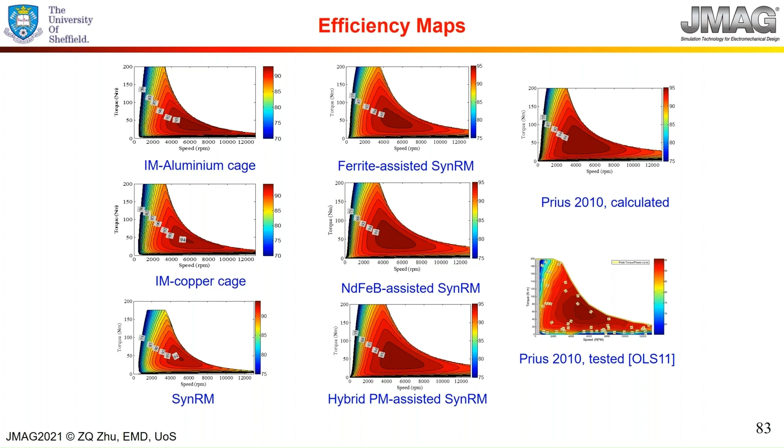The conclusion from here is very obvious: the PM machine is the current technology for electric vehicles, not the induction machine, and definitely not the reluctance machine - that one is gone anyway. From those analyses, it should be eliminated.

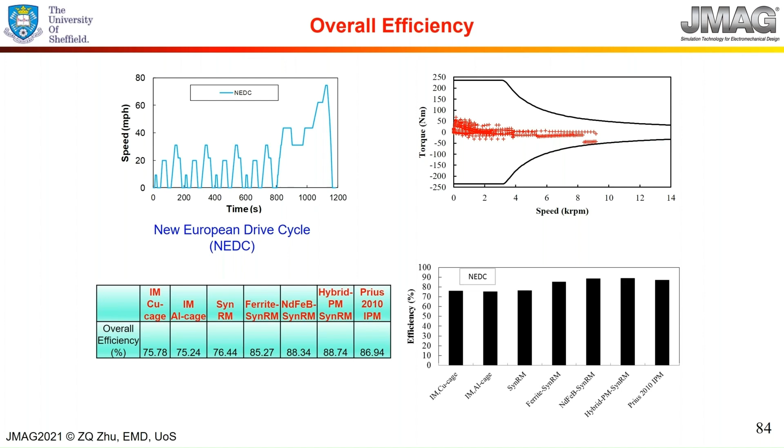Okay. So Tesla used to use the induction machine. It's a good machine, by the way. Okay, I'm not saying better machine. I already showed that the overload capability is really good. The efficiency is also not too bad. But with the current battery technology, it's preferable to use the permanent magnet type of machine rather than the induction machine. A lot of people worried about the resource of the neodymium magnet and also the fluctuation in the price.

I don't worry. Why? Well, we have the induction machine. Still a good machine. And hopefully at that time we have better batteries. Then it's no problem. A lot of people try to work on magnetless machines, and they try to develop a lot of new ones. Our personal opinion is, looking at it, the performance is still not as good as the induction machine. So we don't need to worry too much. Worry about the problem we need to solve rather than the far-away future. The induction machine is still a good machine, but for the time being, it's definitely the permanent magnet machine.

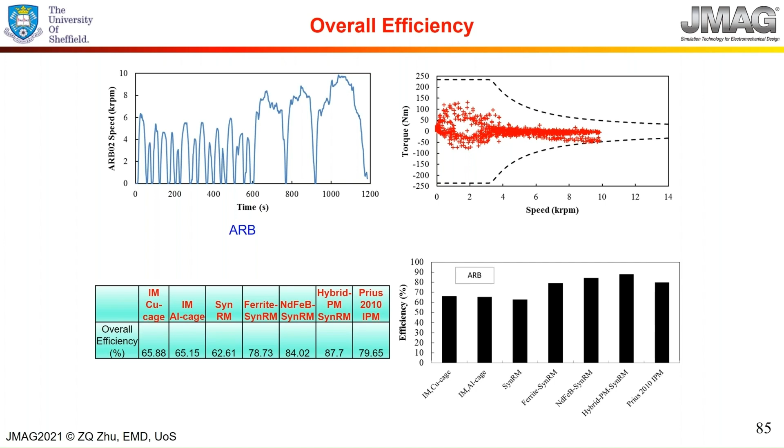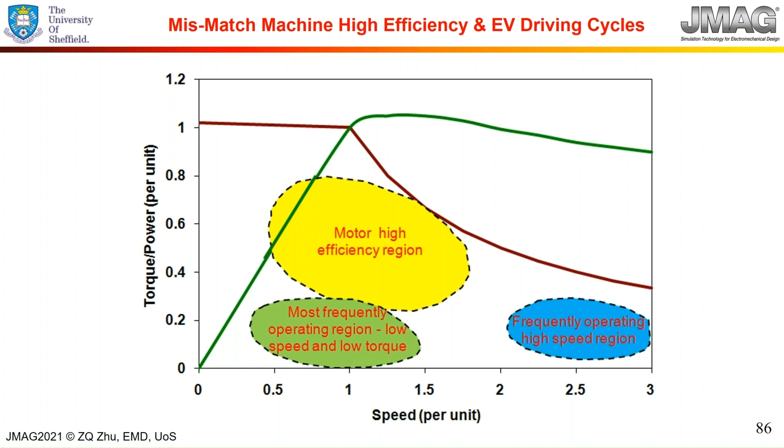Okay. We still have a challenge even for the permanent magnet machine, because if you look at where it is frequently operated, it's somewhere here or even here. The induction machine is supposedly good here, but the PM machine is no worse here as well. It's also quite good there, but the major difference is here. The most frequently operated region is here, but our machine's highest efficiency is always there. We have a mismatch there. To be honest, I don't have a solution. If you have a good solution, set up a company, you'll be a rich man. I'm quite sure.